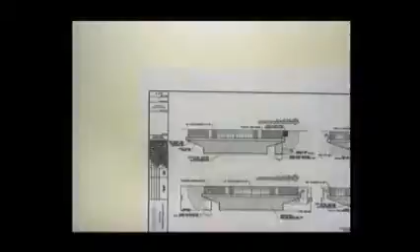What we have on the overhead represents what the building looks like with the flat roof, and what they plan on doing is going to a non-flat roof. They will have it sloped.

This is one of those situations that we read about in the newspapers sometimes, but fortunately this was taken care of before we read about it in the newspapers. If you remember, on February 25th, we had a really heavy rain, and the roof drains on this building got clogged. That's one of the reasons John Householder preaches big roof drains. After the storm, the roof was retaining water unbeknownst to the occupants, but they noticed the roof was leaking, and so they contacted, fortunately, an architect rather than just a roofer, because they had had roof leaks in the past.

They contacted an architect and said, we may want to do something more than just repair the roof. The architect looked at it and promptly closed the facility down, because the only thing holding the roof up was non-load-bearing walls. So fortunately, no one was hurt, but it was a good thing they called in an architect. If you wanted a good view, you just had to go up in the Hampton Inn and look down, and you could see what he was talking about.

So we have actually issued permits and everything for this, because this was an emergency situation. Fortunately, no one was hurt, and they are proceeding, and they are taking care of the problem. So obviously, we are recommending approval of this. They've met all of the requirements with what we needed from our end, showing from the site plan requirements. But this is one of those situations where we're extremely grateful that nothing actually did happen, and they caught it before. How old was that?

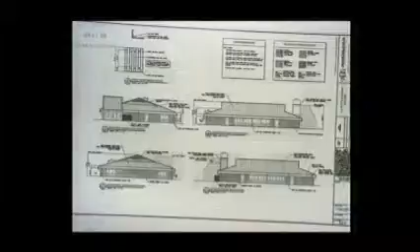Any other questions from the Planning Commission or anyone in the audience? Do I have a motion? Move to approve. Second. All those in favor say aye. Aye. Opposed? Thank you very much, and we're glad nothing else is having to be done here.

Item number 9, discussion and public hearing on a concept plan for the villas at Anchor Park, an attached single-family development. Parcels 59 and 59.606, tax map 152, located on the north side of Turkey Creek Road across from Anchor Park. Approximately 30 acres, zoned R-4, 108 units, and a variance request from the Farragut subdivision regulations to reduce the required pavement width from 26 feet to 22 feet, and to reduce the required K value for sag curves at 6 locations. Smith Farm Residential Partners, applicant.

And I'm sure Ruth is going to tell us what K value and sag curves means. Where's Larry Bull? We had that course once. Actually, if you want to go into the details, I want to defer to Chris, but I can explain it to you in layman's terms. I think that's what we need.

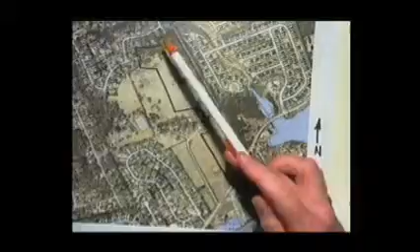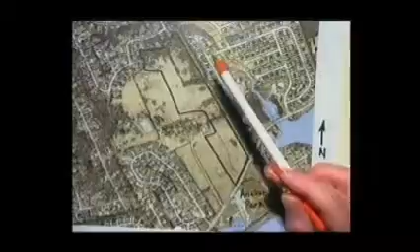There will be no road connections, but there will be walking trail connections to these two streets, and then also a couple connections to the walking trail as we're going up the hill. If you're familiar with this, you know that this goes up the hill. When you're standing on Turkey Creek Road and you look toward this existing single-family house, you are looking up the hill. And if you have ever walked up the walking trail on the Turkey Creek walking trail, you know that you're going up the hill.

One of the things that we get a lot of complaints about is that the town is speeding within subdivisions. So when we met with the designer, Chris Sharp, on this, we were like, can you make some modifications to try to do some things to actually slow traffic down? And Chris, we commend him for what he did with this. This did result in some variance requests, though, because of this.

And the first one being reducing the pavement width from 26 feet to 22 feet. And then I'm going to read the rest of these. Reduce the required K value for sag curve from 99 to 5.88, Street A at the entrance from Turkey Creek Road. Reduce the required K value for sag curves from 99 to 35, Street A, Station 0 plus 73.5 to Station 1 plus 69.98.

Reduce the required K value for sag curves from 49 to 35, Street A, Station 12 plus 0.34 to Station 16 plus 76.40. Reduce the required K value for sag curves from 49 to 5, intersection of Street A and Street B.

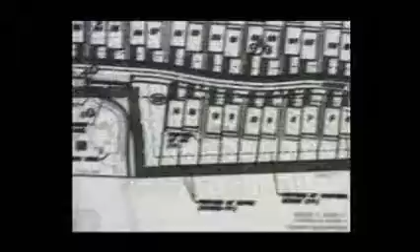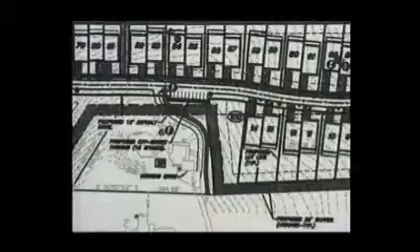One of the things Chris did was little bump outs at a couple of different locations where he provided some on-street parking, but perpendicular rather than parallel. If you did it parallel, that just creates a wider street, and people would go faster again. So where there was room, he added a couple of places of on-street parking.

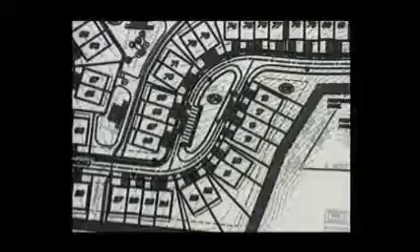This is about halfway, two-thirds up the hill, past the crest, where he added some other on-street parking.

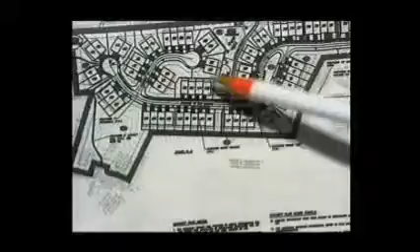As I explained earlier, there are some walking trail connections to the adjacent walking trail, and we always require a walking trail to stub into adjacent vacant properties. One there, and then this is the tie-in to Finch, and then the tie-in to Bobolink.

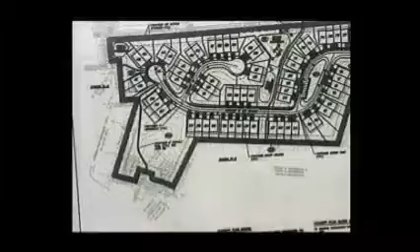At your places in the staff recommendation, we recommend approval of the variances, and we also recommend approval of the concept plan, subject to items 1 through 7, number 7 being meet all town requirements.

Before you take action, one thing you may have noticed in the letter we wrote, and asked them to look carefully at, is numbers 14, 15, and 24, that the building footprint design did not capitalize on the views. If you've been up through there, you know the views are spectacular. That also addresses adopting the traffic calming, and they did a good job of both.

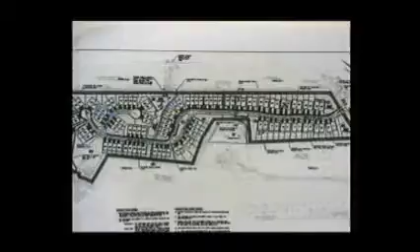Chris added, rather than making that such a straight shot through here, he put a little curve into it. He staggered the buildings so the back porches could capitalize on the views as much as possible. There's not a whole lot of flexibility given the width of the property, but he did a good job creating less of a row house look, a better design that will be more appealing to potential purchasers, and also for the existing Turkey Creek Road area residents in terms of design style.

Does the audience have any questions or comments?

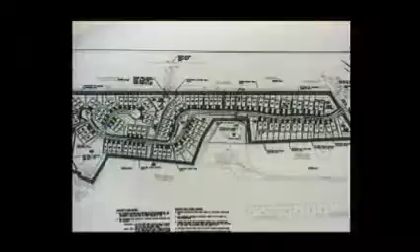Do we have a motion? First, a motion on the variances, and you can do that as one motion, and then we need one for the concept plan, so we'll do the variances first. And on the concept plan, obviously one of those will be, we need to add an 8, and that is the rezoning being finalized.

Do we have a motion on the request for the variance? Second? Second. All those in favor say aye. Aye. Opposed?

So do we have any questions before we move on to a motion? Do we have any questions about the concept plan from anyone?